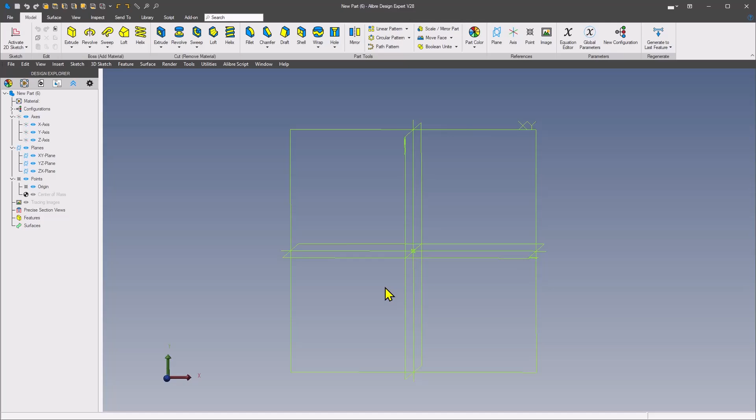Hey, I had a request online to create a video showing how to create a hex bolt based on a tutorial that TooTallToby had illustrated and done in Onshape, and the user wanted to see how to create that same bolt design in Alibre using the tools we have in our program.

Obviously we don't have all the shortcuts Toby was using in his video, so I won't be using any shortcuts in this demonstration, but I'll use the menus and the in-place sketch menu that pops up once in a while. As far as moving the view, I've got a 3Dconnexion SpaceMouse that I'm using to manipulate my view. So when you see parts moving around with no obvious movement of my mouse, that's the 3D mouse manipulating the view. With that, let me get started here.

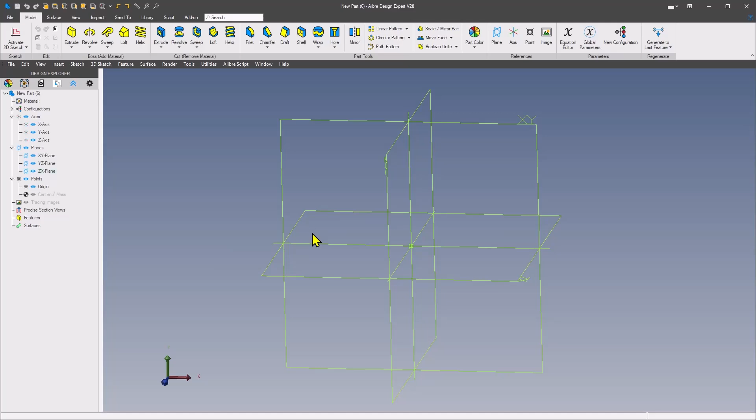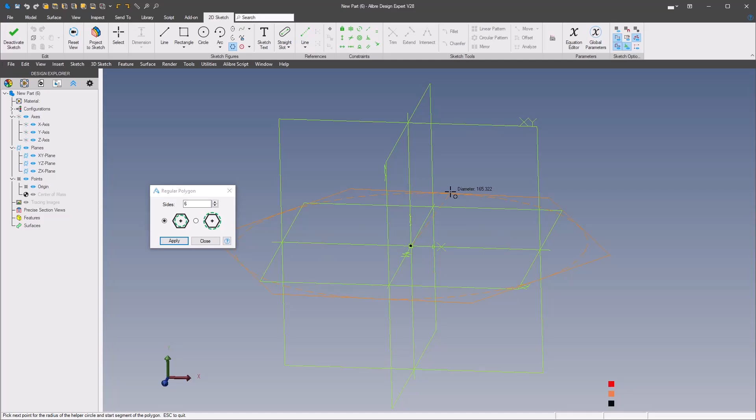We'll start off with a sketch on our ZX plane. Right click on the plane and select Activate 2D Sketch. Then up in the ribbon, we're going to grab our regular polygon tool. In Alibre, this defaults to 6 sides and inscribed circle, so there's no settings you need to make unless you want different size sides or whatever. So here, we'll click on the origin and drag out to get our sketch for the polygon, then click apply and close.

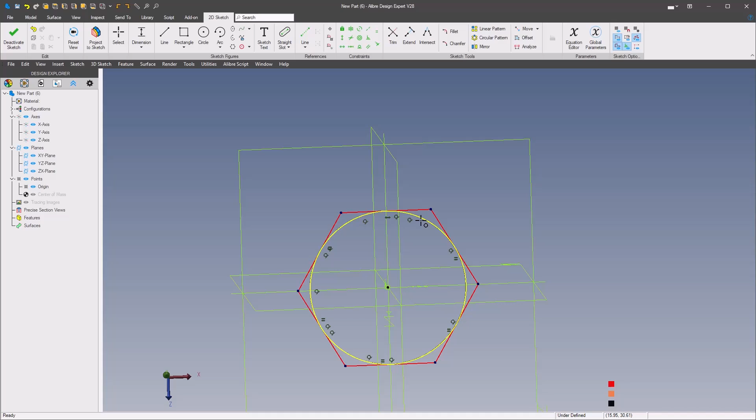Then left click on a horizontal line and the in-place menu pops up, and we'll grab our constraints and add a horizontal constraint. Again, we'll bring up the menu with a middle mouse click and click on dimension. Now we can dimension either 2 horizontal lines or grab the circle and place a dimension. Toby had 40 on his part, so we'll use that.

Then we'll click on Orient to Sketch Plane to bring everything normal. And then we can just tip it back and go to Features, Extrude, and we're going to go to a depth of 13 to complete the hex head part.

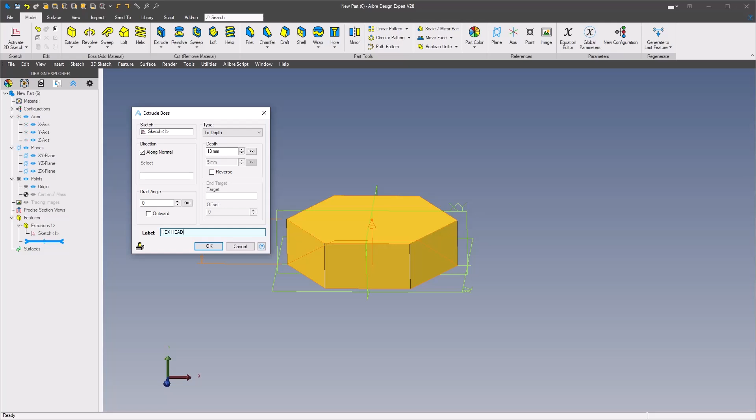One thing he did was rename his parts as he was creating them. You can either right click on them in the Design Explorer and click Rename, or while you're creating them, when the dialog box is up, there's a field called Label. So we'll click in the label, type in the name, and hit enter, and the rename is updated in the Design Explorer.

So now the next step was to create the trim cut that he had to knock off the corners of this hex on the top of the bolt.

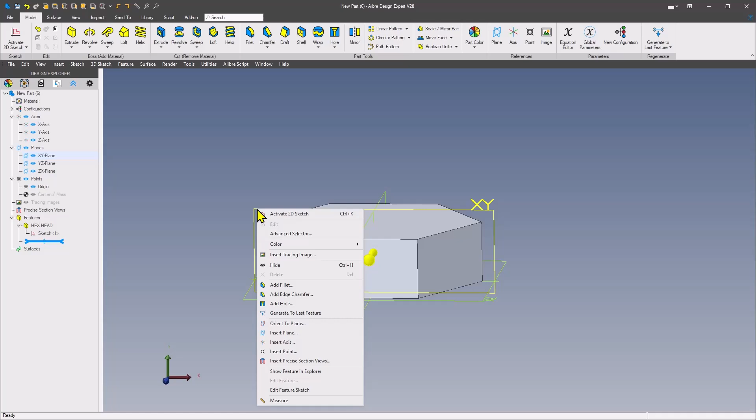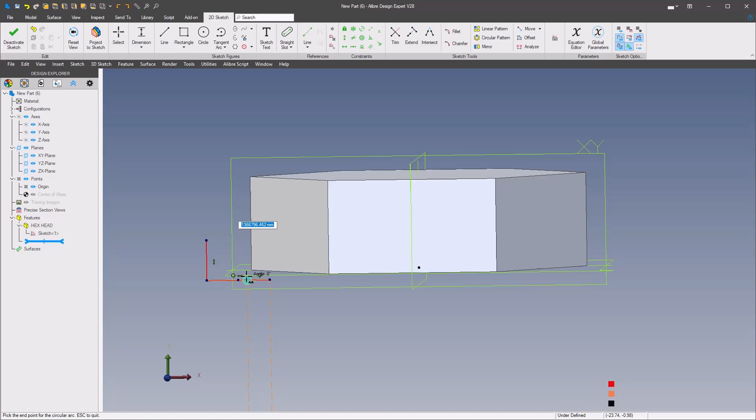So we're going to right click on the XY plane, activate a sketch, and we're going to draw a vertical line and a horizontal line. Grab our line tool, grab a vertical line and a horizontal line. As you draw them, if you watch carefully, you'll get the constraints automatically applied. Then we'll grab our arc tool and select tangent arc, select the right end of the horizontal line, left click to select it, and it attaches the tangent arc to it, then select the vertical line to complete the arc.

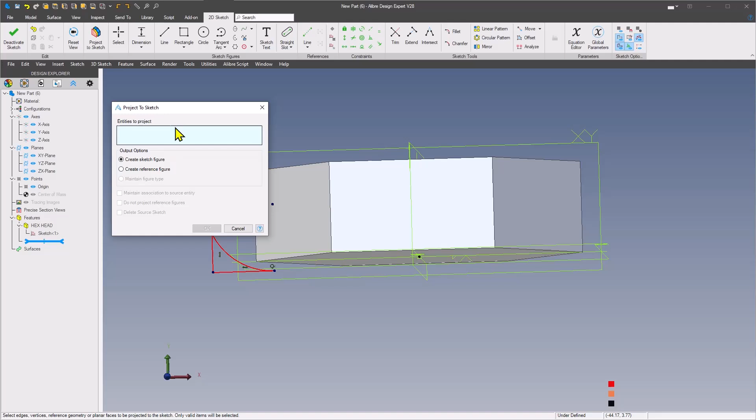Now we're going to have to constrain this to this corner, so we need some reference geometry here. We're going to do a project to sketch. In this command, we're going to grab the sketch off the Design Explorer, and this is the sketch we used to create the hex. We're going to create reference figures and maintain the association toggle, make sure that's on, and click OK. Now every entity of that sketch is projected onto the XY plane.

The nodes here that you see are the endpoints of those reference lines, and the ones we're concerned about are this node here and this one here. Those are the nodes. When you look at the sketch, that's going to be the one that defines the circle, the reference circle for that sketch.

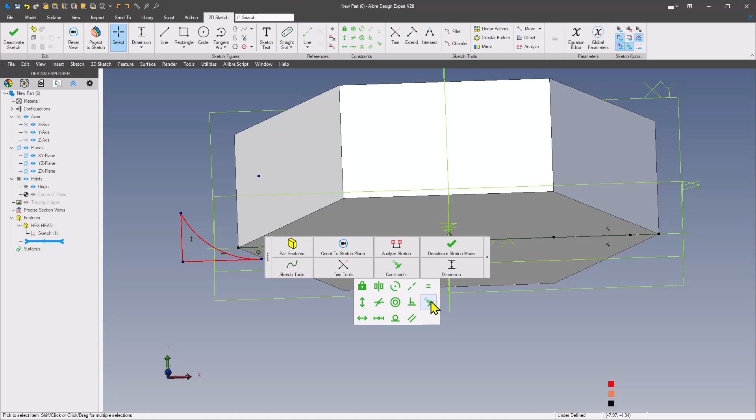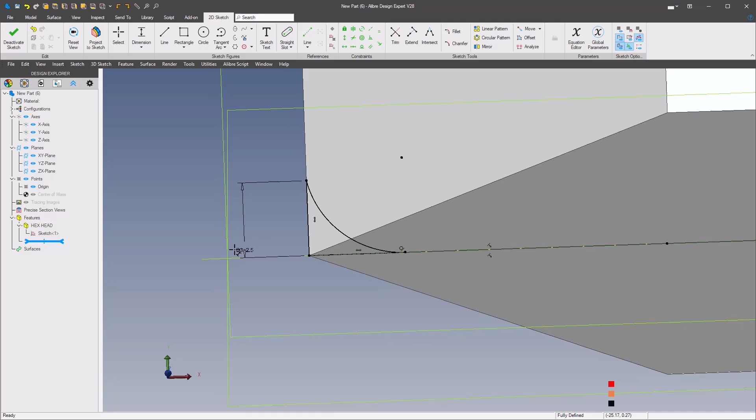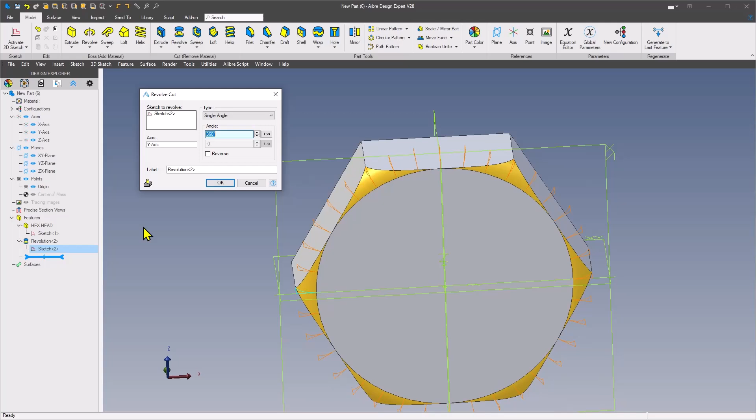So now we need to constrain our profile sketch to this node, and then this end node to the end node there. I'll grab our dimension and zoom in here to grab this vertical line and click on here to put in the 2.5 dimension that Toby used on his model, then a middle mouse click to bring up our in-place editing menu. Go to features, and we'll do a revolve cut, and for the axis we'll grab our y-axis, and that's going to preview to trim off those corners, same as what Toby had in his model.

So now let me rename this. This is going to be the hex head trim.

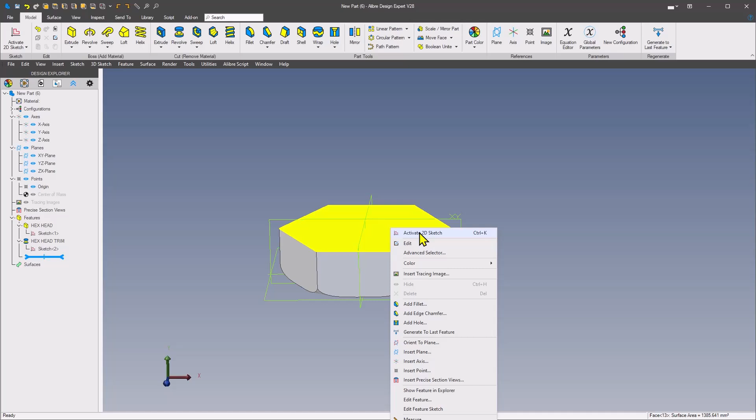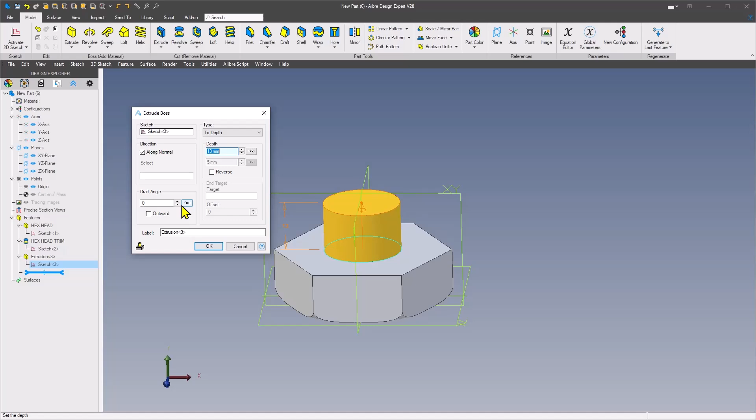Now the next step is to create the body of our bolt. So we're going to create another sketch. We'll right click on this face, select activate sketch, grab our circles, select the origin, and drag this out to 20 millimeters. Then we'll go up here to grab our extrude, and we're going to extrude this to 60. While we have this open, we'll put this in bolt body and click OK to finish that.

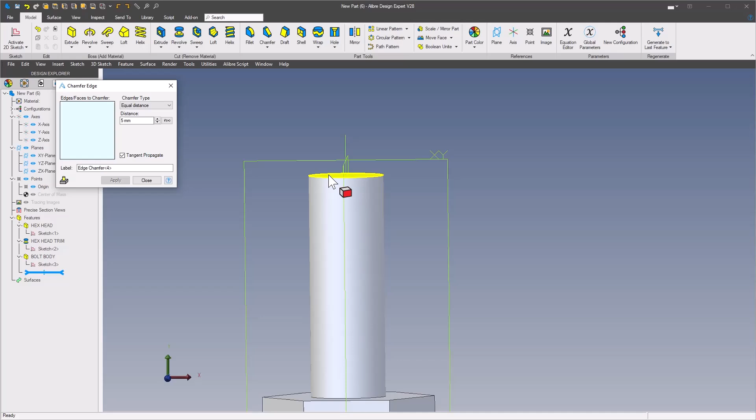Okay, now the next step was that he was going to preemptively place a sketch in here that we can use to trim this corner or end of the body bolt off as a miter. Once you have the threads on here, you can't come in and do the chamfer. So if he's going to do a 5 millimeter chamfer, you can't do that with the threads up here. There's no way to trim the threads off with the chamfer tool.

So we're going to do likewise. We'll start an XY sketch on the XY plane. Grab our line tool again, and we'll sketch out the same basic shape that Toby had here. We'll have this as a horizontal line, and then we'll add some constraints.

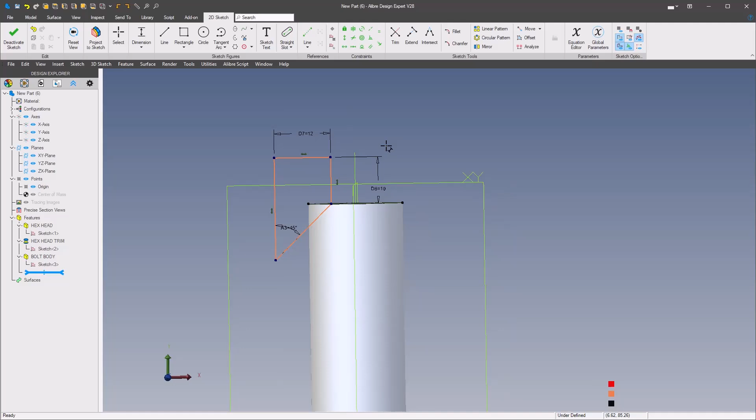We're going to do a coincident between this node and this edge, and then some dimensions. We had this one here at I believe 10, we had 12 on this line, 45 degrees on this angle, and then from this line to the axis he had 5 millimeters. And that completes that sketch.

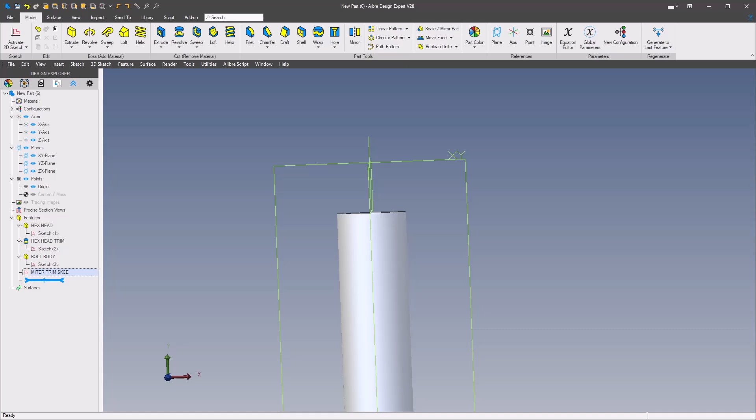So let me just rename this really quick. That's going to be the miter trim - TRIM - miter trim sketch. Okay, now if you want to have your sketches turned on so that you see them all the time, we'll go up to the view menu and select this display.

We'll toggle our sketches on, so now we can see our sketches at all times. Or you can leave them off just to keep your workspace clear of a lot of clutter.

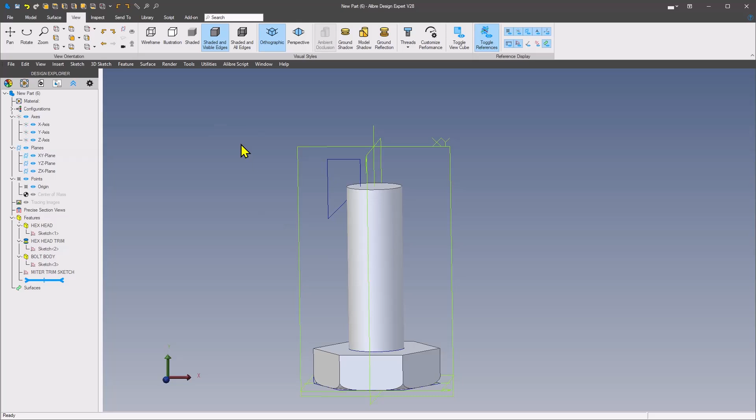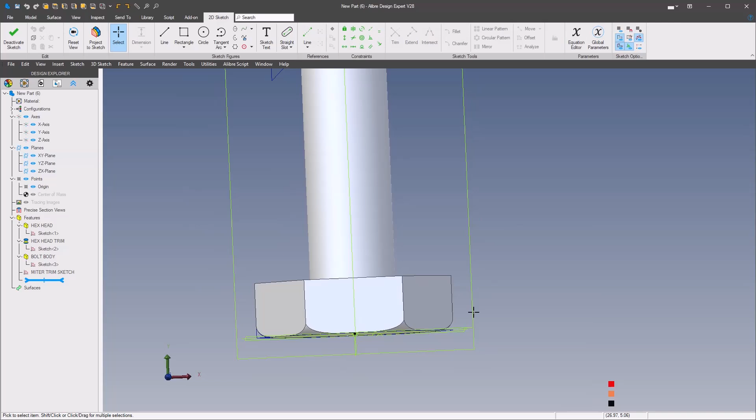Okay, now the next step here is to create the actual profile for the thread feature that we're going to add in here. Again, we'll start that profile down in the body of the hex head. So we'll right click on the XY plane, start a sketch, grab our line tool again, go horizontal, go vertical, put an angle line in here, and then down on the back side.

We'll make this line, left click, constrain that to vertical, then right click on it and select convert to reference figure for that. Then we're going to capture these 3 lines. You can either left click, and you can't do a chain select... here we go, yeah, you left click on one of these lines, and in this menu you have a chain select, and that's going to select all those lines for you.

Come up here and say mirror, and our mirror axis will be this horizontal reference line, and then it completes our thread profile except for some dimensions.

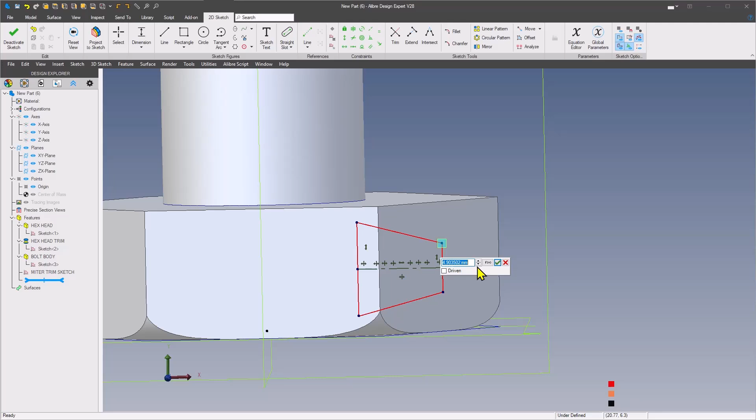Now we'll just add some dimensions on here. Toby used 1.5 on the front, 4.2 on the back side. Let me reposition this a little bit, drag it over, because now we need to dimension it and position it below the surface.

Grab our dimension tool, select this top node, then come up and dimension to this edge. Left click, and that gives us a dimension to a reference line, that's going to be 0.5. Then between this vertical line and the end node, another 0.5, and one more dimension here for the total height to be 3 millimeters.

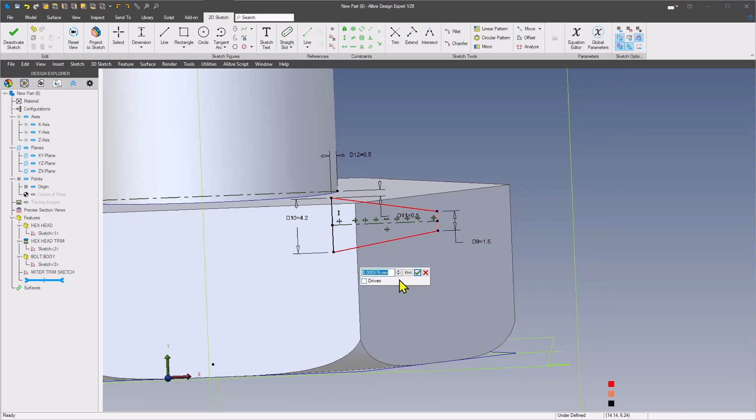As Toby indicated, he could go from this line to the origin or vertical axis too, but we'll just follow his lead on this part here.

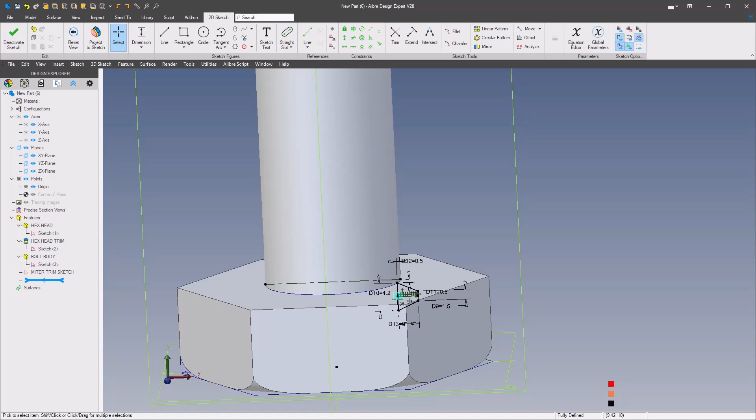So in Onshape, he created a helix by creating a plane, and then set this on a plane that was not vertical to the work plane.

Well, Alibre has a helical tool, so we're going to create a helical boss. That's going to grab this sketch and our reference line for an axis, but it's going to grab whatever reference line is closest to the sketch, in this case the horizontal line here.

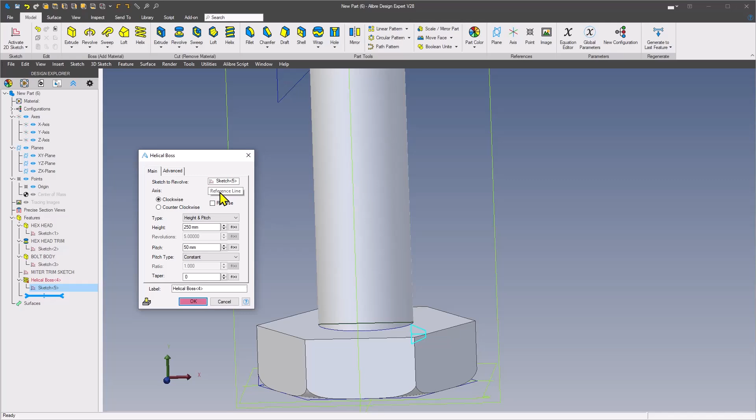What we want is actually the y-axis, so if we highlight that box and then select our y-axis, it's going to adopt our default height of 250, and we want to match our body height and then extend on just a little bit further.

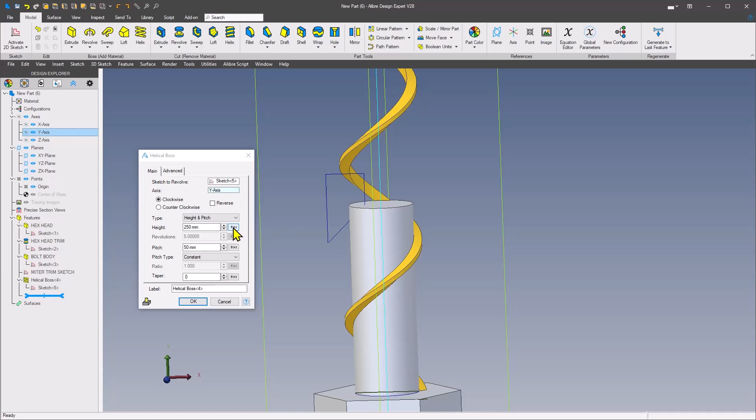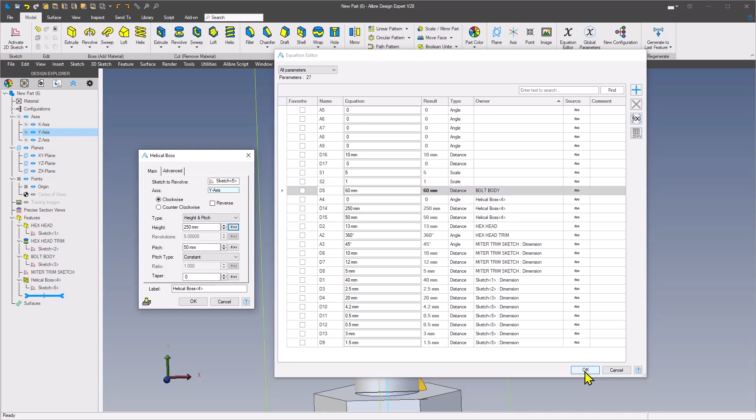So if you click on FX, it's going to open up the equation editor. Click on the owner column to sort everything in order, and then in our bolt body we have 60, so click in the 60 line and then click OK, and it copies the length of our bolt body into our height and readjusts our preview.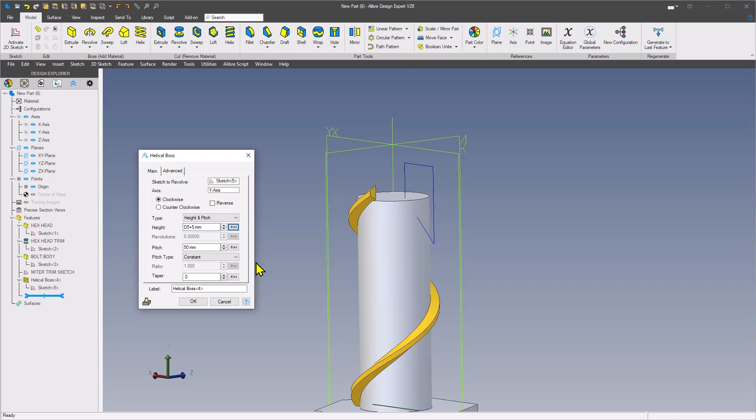But we want to extend that beyond, so if we click in here and hit add 5, hit tab, that updates our thread to be beyond the bolt body length, and whatever this length changes to, it will maintain that association because those two are linked now.

And here we'll change this to thread helix, and then click OK.

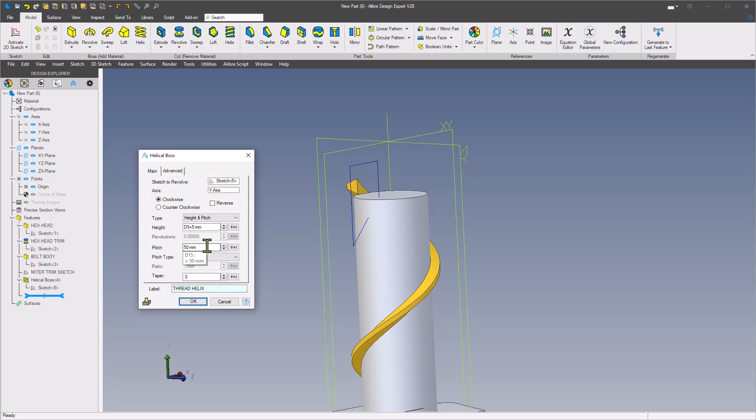Whoops, before we do that, we're going to change our pitch. We want pitch to be 5, and we get a nice preview of our pitch at 5 millimeters, stopping at 5 millimeters above the line.

Now he made a comment about, because his sketch was made on a plane that was normal to his helix. In Alibre, if you go to the Advanced tab, you have orientation options here, parallel or normal.

So if we click on normal, what that does is change the orientation of the sketch to be normal to a plane, the same as having a plane on the end of a helix. Notice how the end of our thread profile changed angle here.

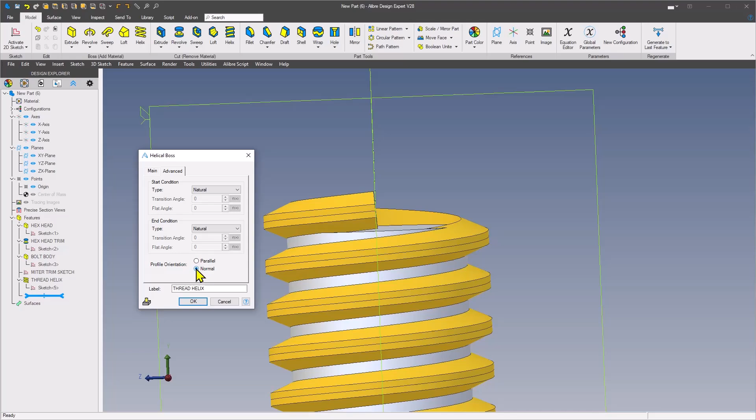If we go back to parallel, it's straight up and down. So you want to change that to normal, and that gives you the same effect that Toby had with his plane attached to the end of the helix in Onshape.

And then we'll click OK, and it completes the helix. The final step again is going to be our miter trim.

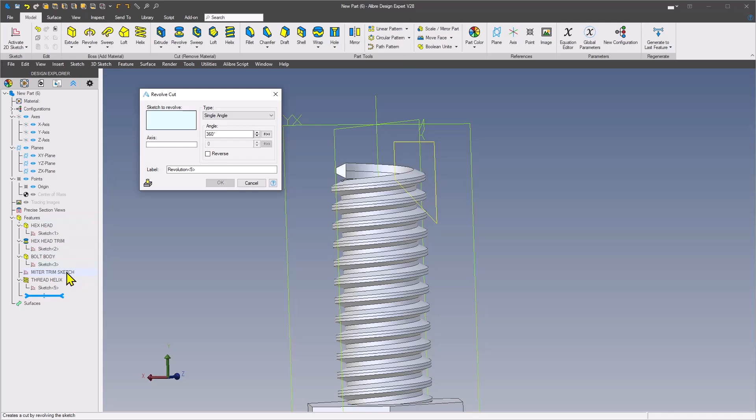So if we come up here and grab our revolve cut, the sketch we want to revolve is going to be our miter trim sketch, and our axis is going to be our y-axis, and it'll update our preview to trim the bolt body and the thread in one step. We'll just call this our trim cut on the end, click OK, and that completes our hex bolt.

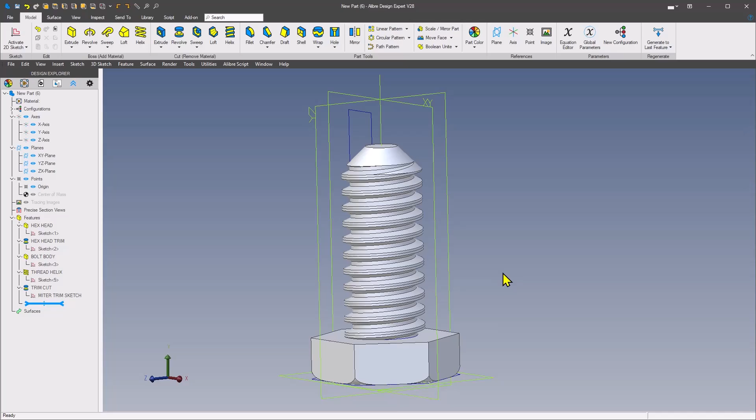So now in our next video, we'll go through taking this hex bolt and creating a hex nut and matching the threads on here with some clearance, similar to what Toby did on his video. So we'll see you in our next video creating the hex nut and creating matched threads. Thanks for watching.